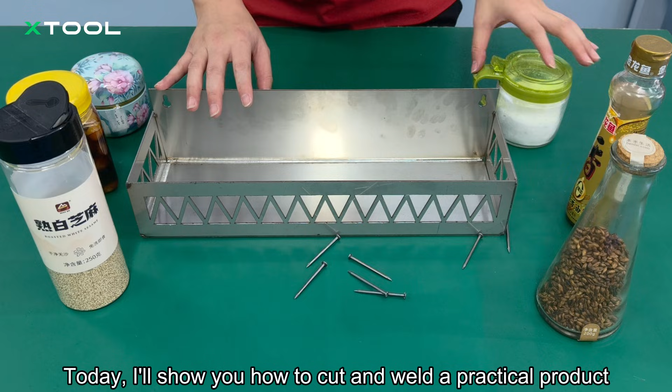Today, I'll show you how to cut and weld a practical product. This is a kitchen spice rack. It can be secured on the wall by tightening screws or nails through the holes. The spice rack is easy to install and remove. Today, let's see how to make such a spice rack.

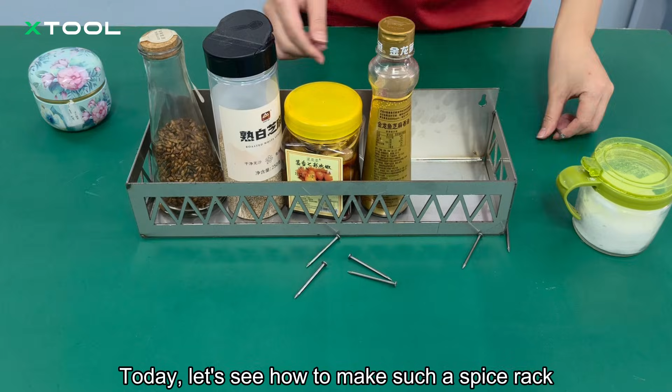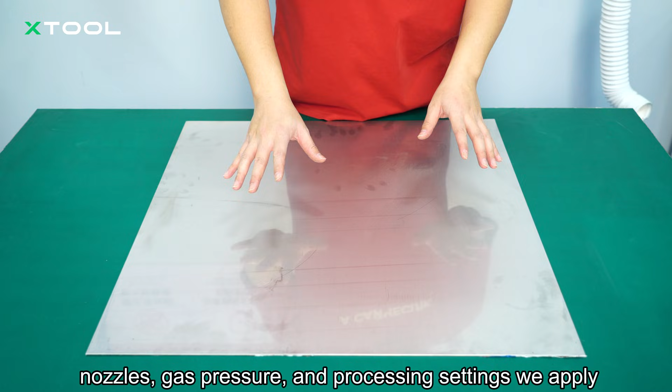Before our creation, let's decide the material type and thickness, as they determine the shielding gas, nozzles, gas pressure, and processing settings we apply. Here we use 2 mm stainless steel as an example. Then apply the corresponding nozzle, shielding gas, and gas pressure as required.

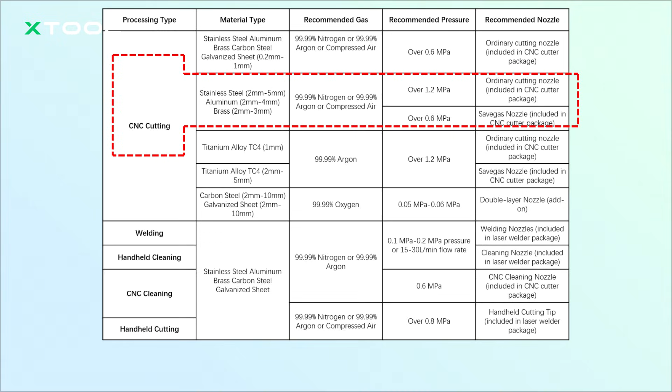First, let's prepare the devices. This is xTool air compressor, this is xTool air dryer, and this one is xTool MetalFab laser welder. Use tubes to connect these devices. Use a tube to connect the air compressor and the air dryer inlet port. Look, this is the inlet port, and that is the outlet port. Use another tube to connect the outlet port and the laser welder. Now we've finished the device connection.

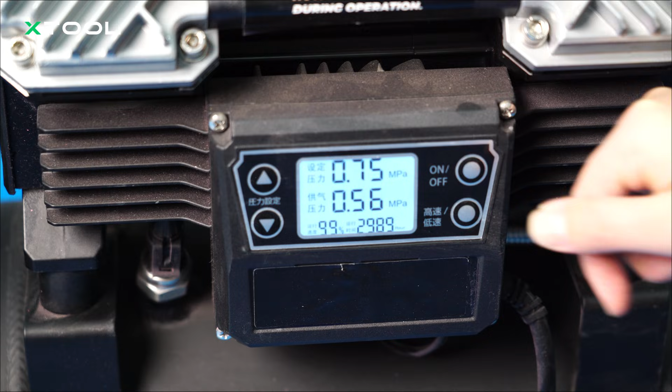Next, power on the air dryer. Then power on the air compressor. Set the gas pressure to 0.75 megapascal. Wait until the device generates gas.

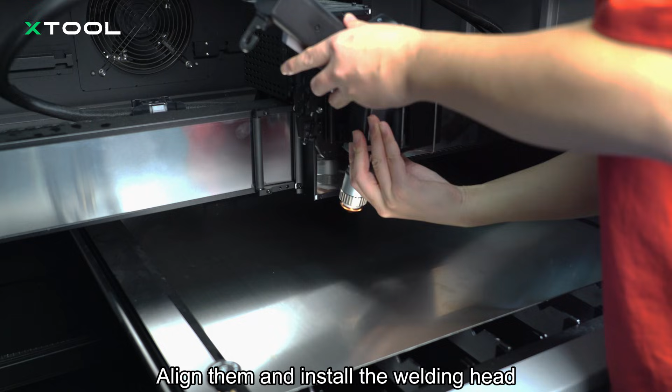During this process, install the welding head to our xTool MetalFab CNC cutter. There are 2 grooves on the welding head and 2 pins on the device. Align them and install the welding head. If the welding head is hot after processing, wear heat-resistant gloves before the installation. Now the welding head is well secured.

Next, install the SaveGas nozzle. Also, please wear heat-resistant gloves if the welding head is hot after processing. Rotate to remove the ordinary nozzle. Then rotate to install the SaveGas nozzle. Make sure it is tightened.

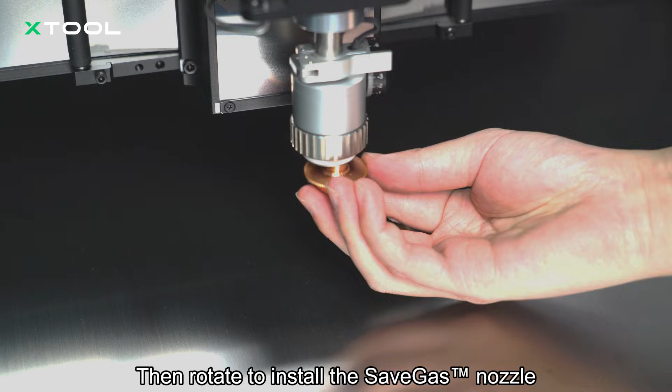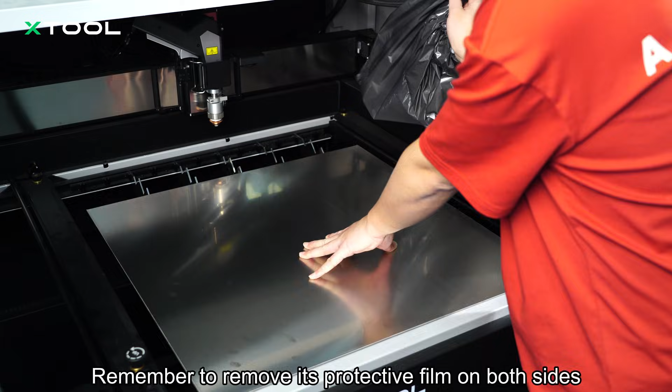This is 2 mm stainless steel. Remember to remove its protective film on both sides. Next, secure the material. Rotate to loosen the knob. Then, insert the material into the slot and align it properly. Insert the material into the left slot in the same way. Lower the linkage levers and tighten the knobs on both sides.

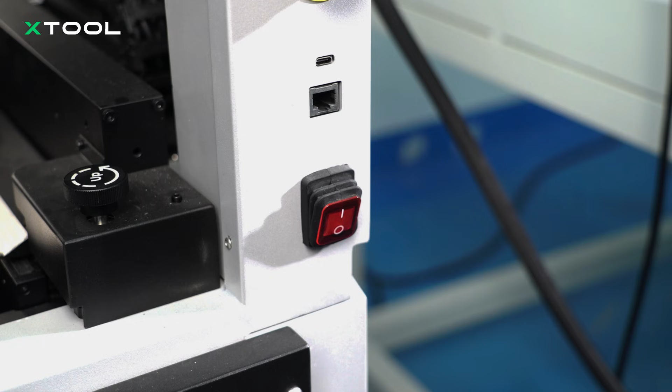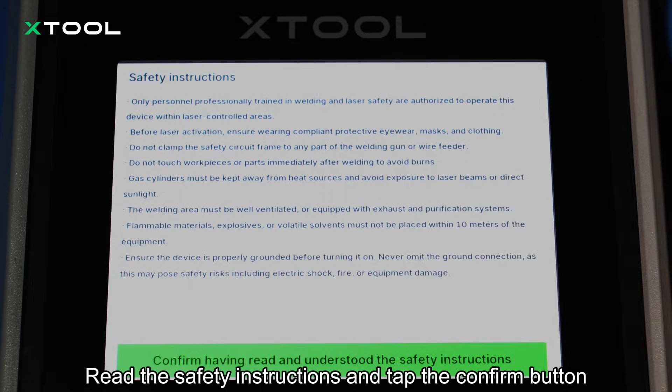Insert the USB cable to our CNC cutter and power it on. Insert the other end to the computer. Power on the laser welder. Read the safety instructions and tap the confirm button. Wait until the touchscreen indicates that CNC cutter takes control.

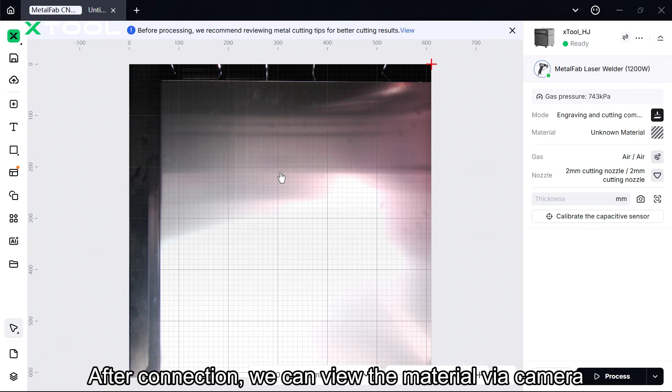Next, let's prepare the software. Open xTool Studio and click New Project. Connect the device. After connection, we can view the material via camera, which is convenient for pattern positioning. Import a design file for cutting.

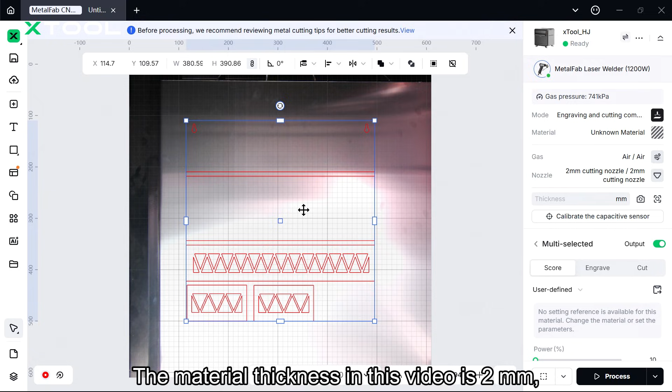Add a lead-in if the material thickness is 2 mm or more. The lead-in ensures smooth and complete cutting of the contour and leaves the cutting defect outside the contour. The lead-in length is usually 1 to 3 times the material thickness, about 3 to 10 mm. The material thickness in this video is 2 mm and thus requires a lead-in. The following shows how to add a 4 mm lead-in, twice the material thickness.

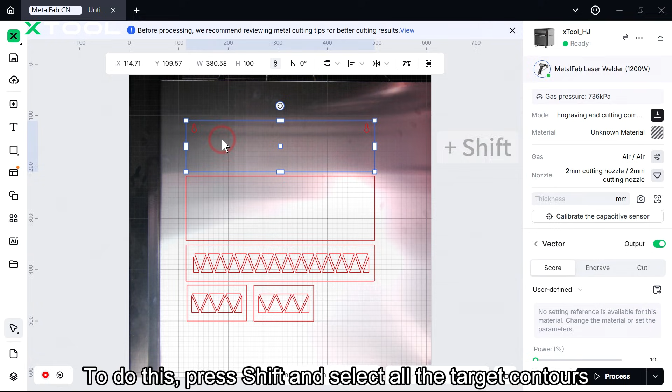First, select all the objects and ungroup them. Then, add different colors to contours based on the lead-in type they require. For contours that require external lead-ins, set their colors to black. To do this, press Shift and select all the target contours. Right-click to change their colors to black.

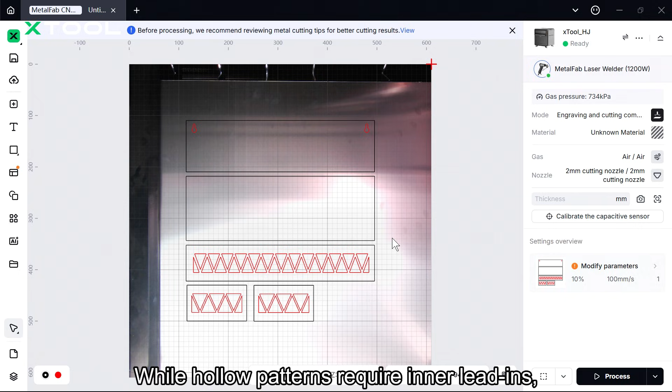Next, we are going to add external lead-ins to the black contours and inner lead-ins to the red ones. In general, solid patterns require external lead-ins, like the parts in black in this video, while hollow patterns require inner lead-ins, like the parts in red in this video.

Select all the black patterns and add external lead-ins. Set the lead-in length to 4 mm, twice the material thickness. Zoom in and you can see these lead-ins.

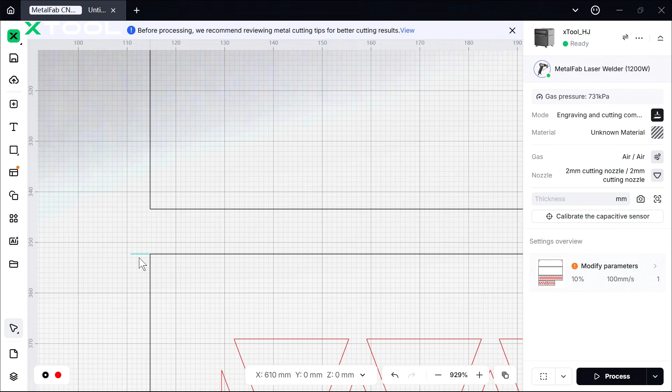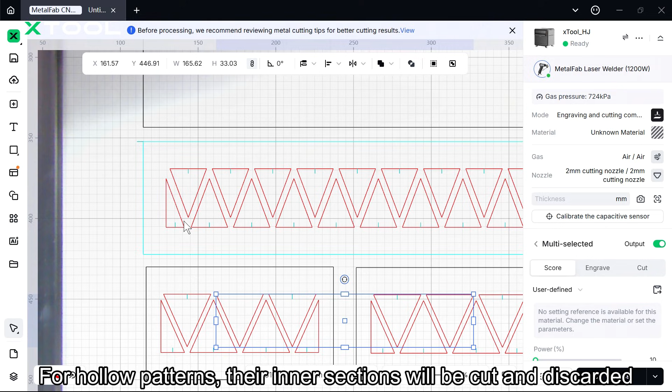Then, select all the red patterns and add inner lead-ins. Inner lead-ins can be a bit shorter, for example 3 mm. Okay, now the inner lead-ins are added. For hollow patterns, their inner sections will be cut and discarded. Ensure that the lead-ins are set inside to avoid damaging the desired parts. After adding lead-ins, place patterns in proper position.

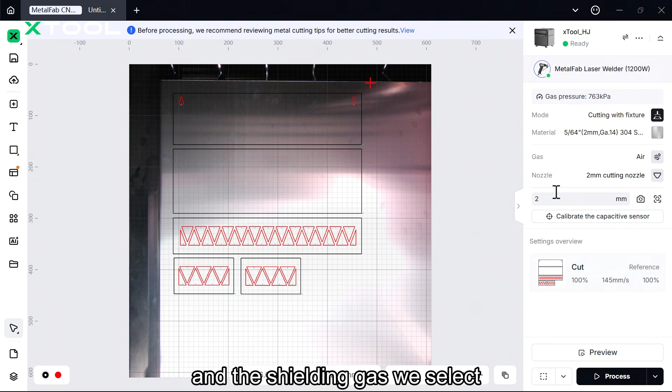Click Mode and select Cutting with Fixture as the processing mode. Click Material and select the 2 mm stainless steel. The settings are recommended based on the nozzle and the shielding gas we select. Click Nozzle and select SaveGas Nozzle. Click Gas and select xTool Air Compressor.

For better cutting results, click Calibrate the capacitive sensor. Click a solid area on the canvas and wait until the calibration is done.

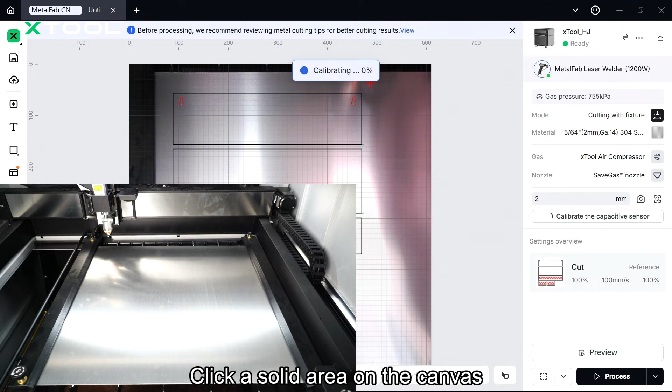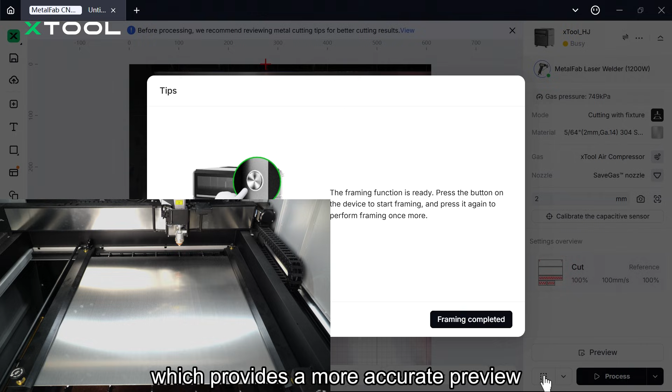Then, preview the cutting position. You can click the camera icon to capture a real-time image of the material. Or click the framing button as shown in the video, which provides a more accurate preview. Observe the red spot and note that the cutting position must be at least 1.5 centimeters from the edge. Confirm the cutting position and click Process.

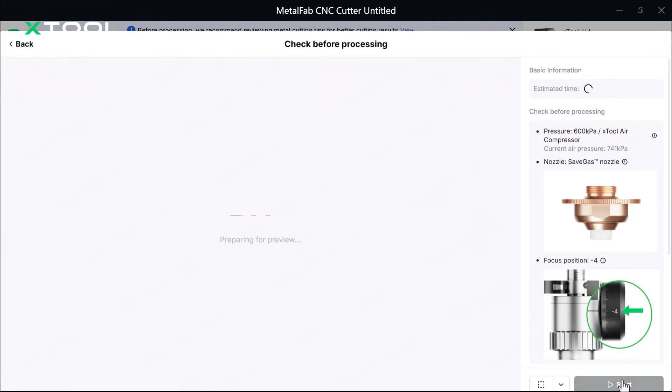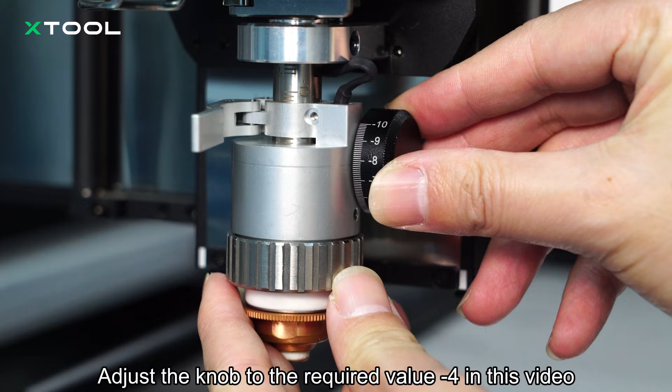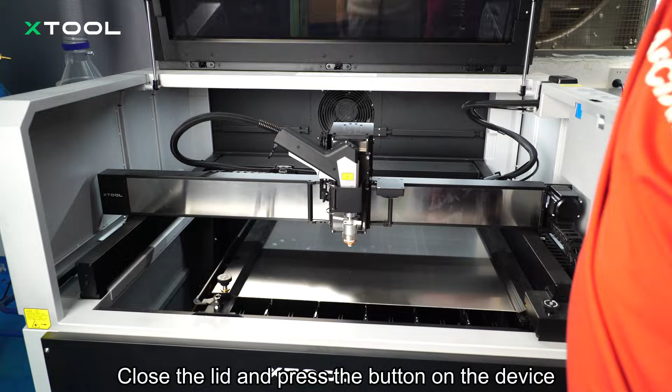Follow the instructions to adjust the cutting tip knob value. Ensure that the knob is turned to the required scale value. If the knob value is wrong, incomplete cutting or dross may occur. Manually move the X-axis guide rail to the front. Open the toggle latch. Adjust the knob to the required value, -4 in this video. Then close the latch. Click Start. Close the lid and press the button on the device.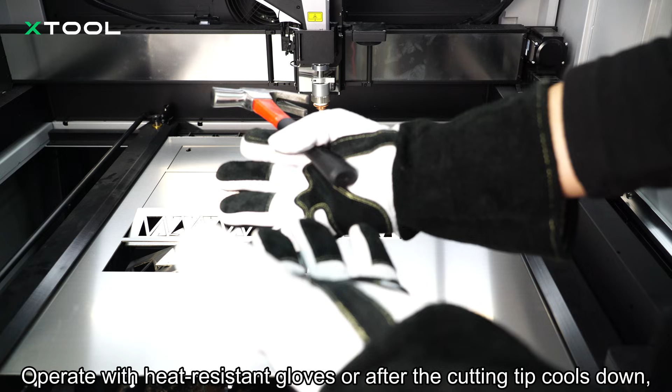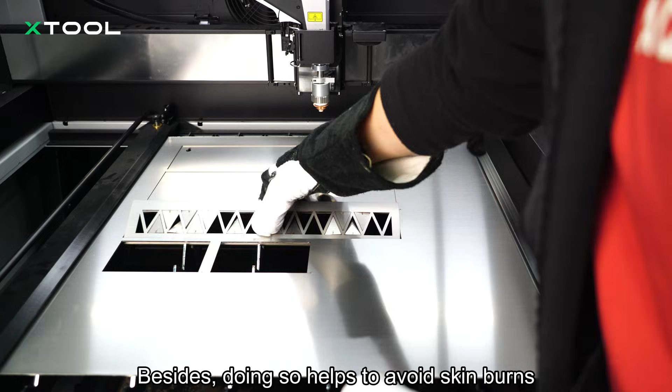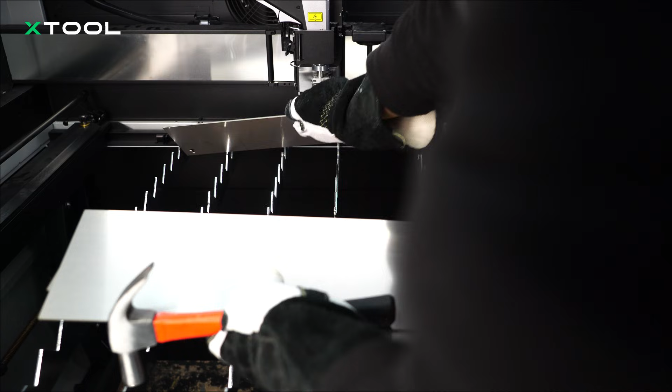Operate with heat-resistant gloves or after the cutting tip cools down, and use a hammer to knock off the cut parts, because workpieces in irregular shapes may not fall off due to friction. Besides, doing so helps to avoid skin burns. Loosen the fixtures to take out parts. Pull out the base plate and fetch the rest of the parts.

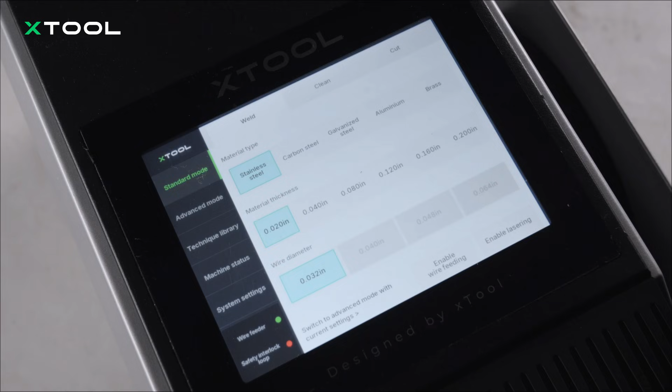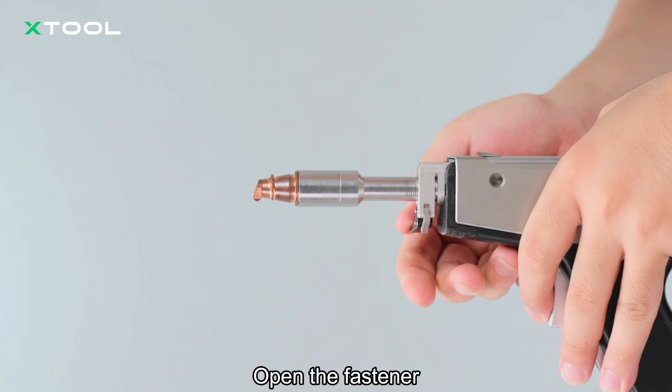Remove the cutting tip and replace with a welding tip. Align the protrusion of the welding tip and the groove of the welding head. On the touch screen, tap System Setting and check the value of Focus Scale Reference. Check if the welding nozzle is of the same value. If yes, no calibration is needed. If not, adjust the graduated tube. Open the fastener. Push or pull the welding nozzle to adjust it to the reference value.

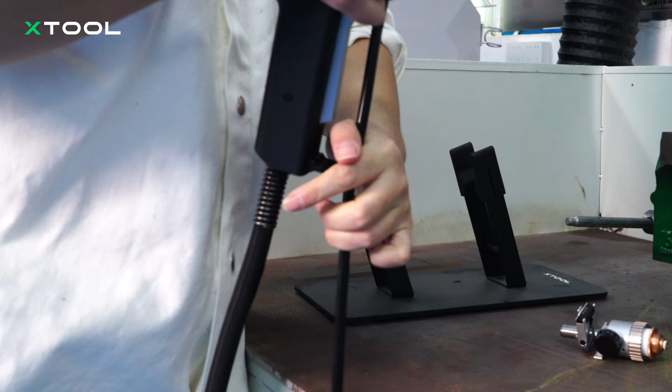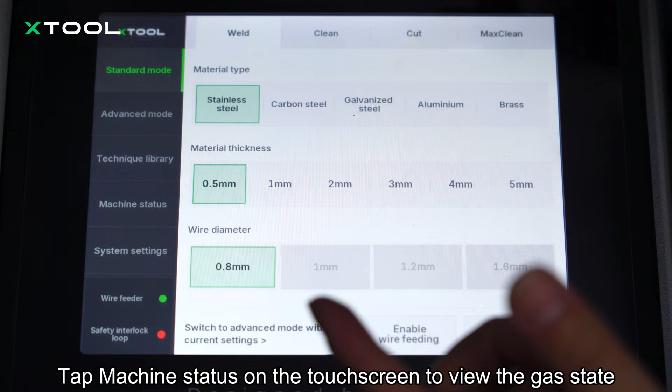Install the welding wire. The welding wire should come out from the groove of the welding nozzle. The welding head is ready now. Tap Machine Status on the touchscreen to view the gas state. To weld materials, use nitrogen or argon as the shielding gas.

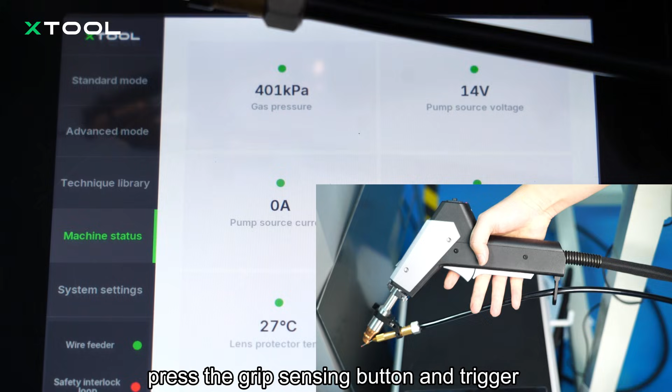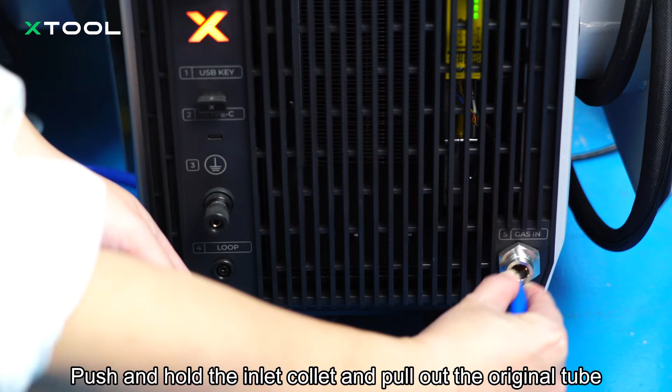Before replacing the gas, press the grip sensing button and trigger on the welding head for gas depressurizing. Keep depressurizing until gas pressure turns to 0 kilopascals on the touchscreen. Then replace the tube, push and hold the inlet collet and pull out the original tube. Insert the nitrogen tube into the inlet.

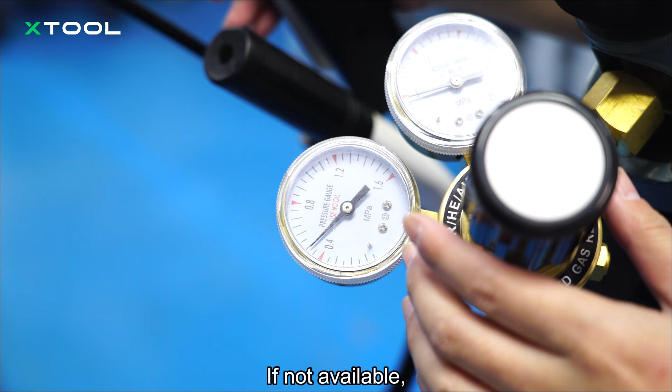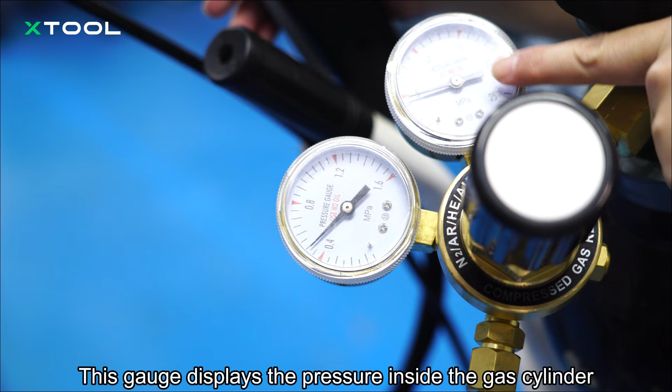A flow valve of 15 to 30 liters per minute is preferred for welding. If not available, a pressure-reducing valve with 0.1 to 0.2 megapascals works as an alternative. In this video, a pressure-reducing valve is used. This gauge displays the pressure inside the gas cylinder, while this one displays the output gas pressure.

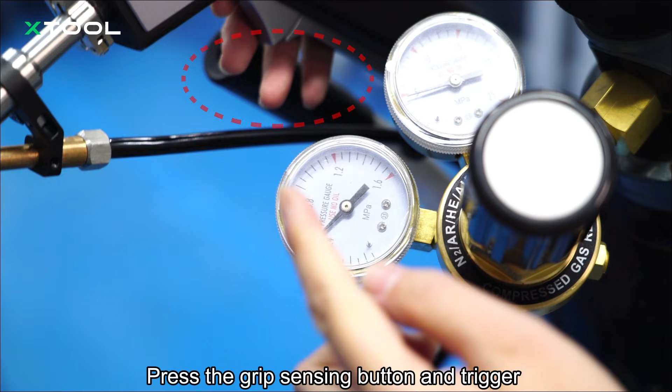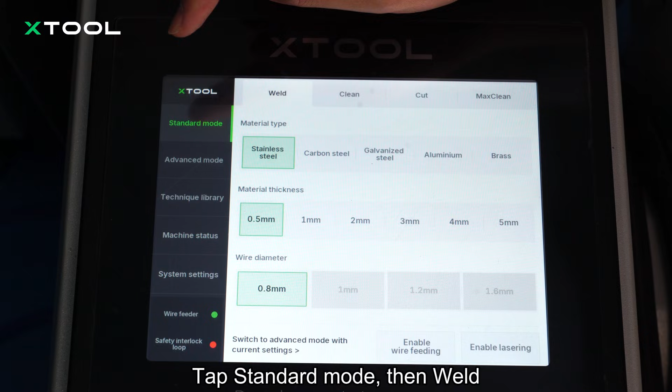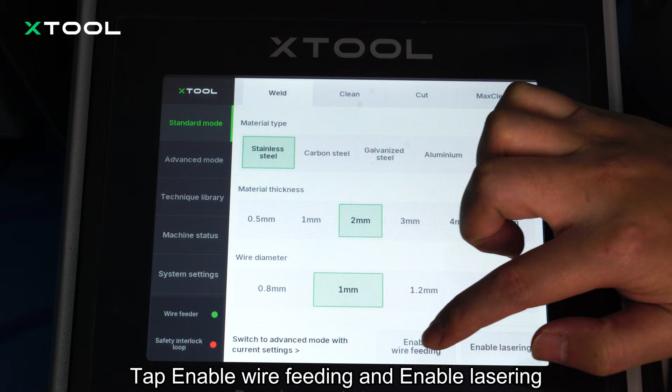Next, adjust the output gas pressure of nitrogen. Press the grip sensing button and trigger on the welding head while adjusting the valve knob until gas pressure turns to 200 kilopascals or so on the touchscreen. Tap Standard Mode. Then select Stainless Steel for the material type. Select 2 mm for the material thickness. Select 1 mm for the wire diameter. Tap Enable Wire Feeding and Enable Lasering. Tap Confirm.

Remember to attach the workpiece sensing cable clamp to the conductive work table where you place the workpieces. By doing so, the current flows from the wire to the workpiece, through the work table, and returns to the laser welder via the workpiece sensing cable. No laser will be emitted if the closed loop breaks.

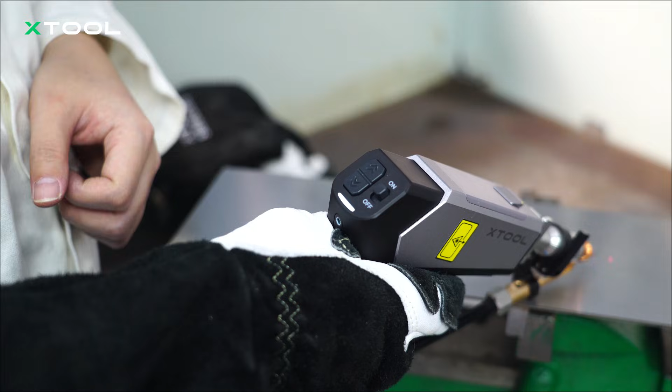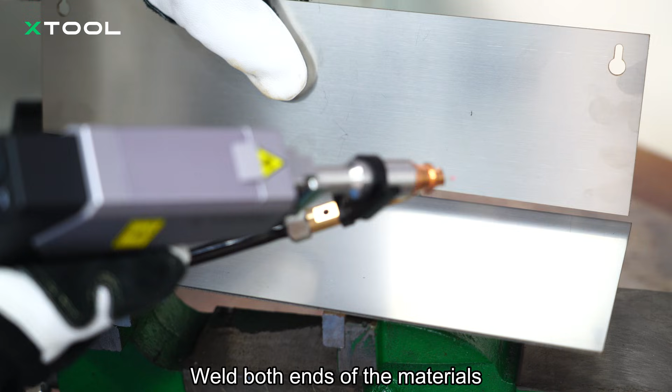Before welding, turn on the wire feeding. Enable switch. This is the feed button. This one is the retract button. Press the buttons to adjust the wire until its tip coincides with the red spot. Now, let's weld the materials. Weld both ends of the materials. Then weld along the welding seam. Doing so ensures a straight welding line.

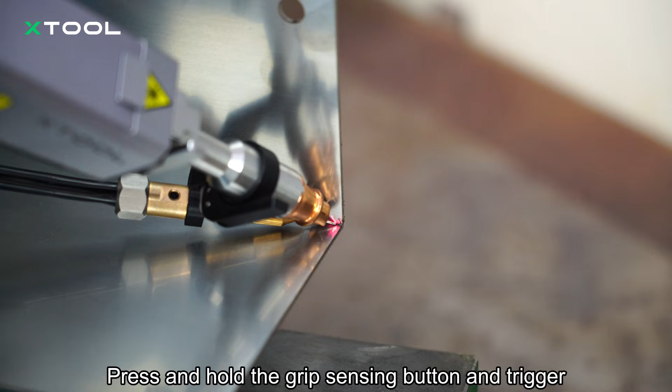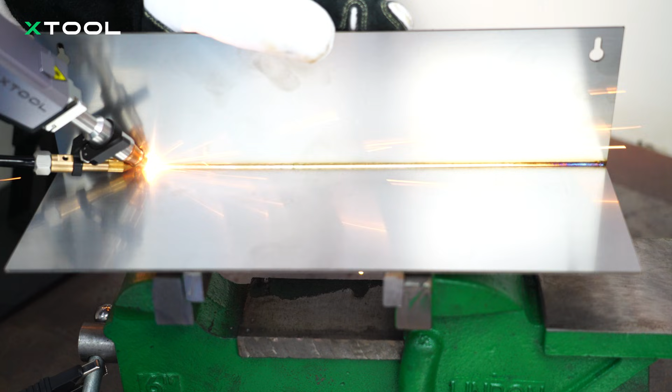Position the welding head at a 45-degree angle towards the welding seam. Press and hold the grip sensing button and trigger. The emitted laser fixes the materials with the wire. Keep welding non-stop from the beginning to the end. A force will push you forward. Just follow that force and pull steadily backward. Since other parts are under less stress, connecting them only by welding the corners also works.

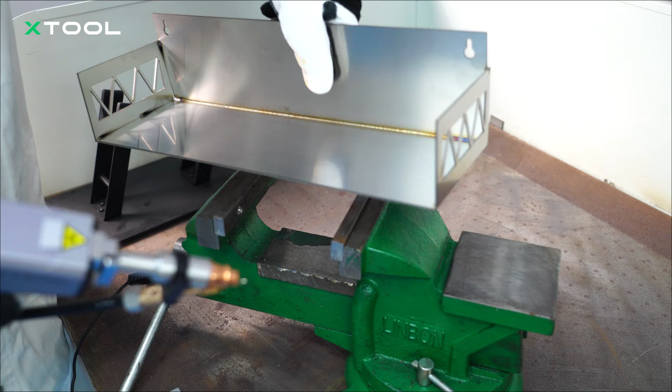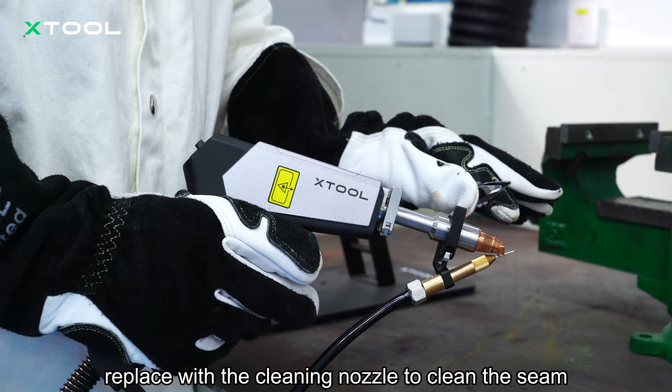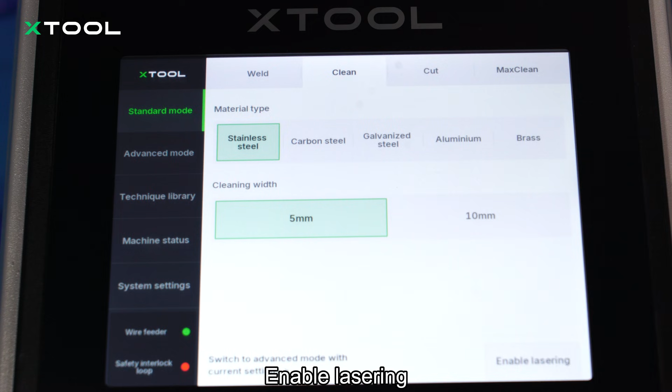If the welding seam is blackened after welding, replace with the cleaning nozzle to clean the seam. Remove the welding nozzle and the wire feeding tube. Align and install the cleaning nozzle. Select the standard mode, choose clean. Select the corresponding material, choose the appropriate width, enable lasering and tap confirm. Now let's clean the welding seam.

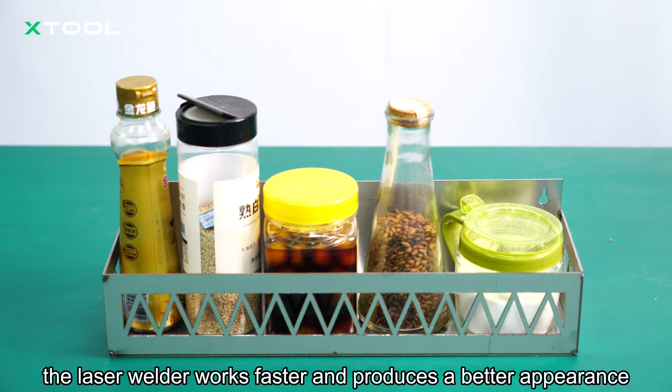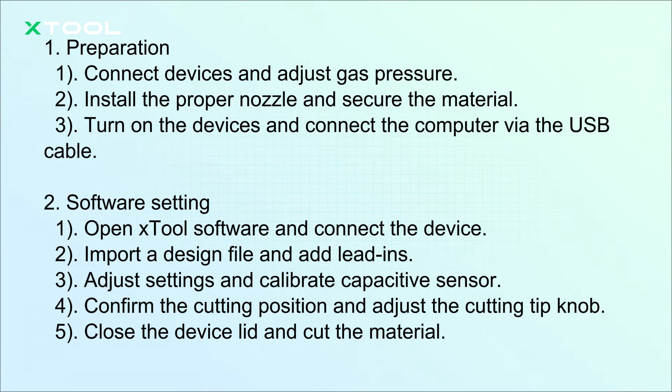Easy peasy, right? In general, the welding effect is very nice. Compared with traditional welding, the laser welder works faster and produces a better appearance. The following concludes today's processing steps. Here are some tips for smooth cutting and welding.